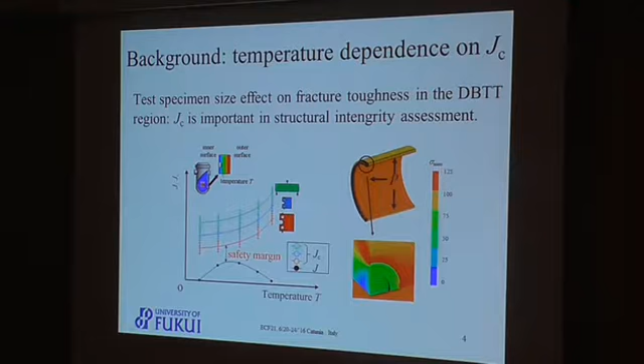One of the widely accepted methods to bypass this test specimen size effect of JC is the master curve approach. The approach assumes a statistical weakest link model for cleavage fracture and uses a Weibull distribution to express the scatter of fracture toughness KJC. The procedure is based on the concept that a normalized curve of the median fracture toughness for 1T, a 25 millimeter size thick specimen, versus temperature is applicable to a wide range of ferritic pressure vessel steels and structural steels.

Thus, KJC median was expected to be expressed with a single parameter, the master reference temperature T0. Despite the efforts to apply the method, the approach is not without its limitations. For example, some results have shown that the master curve reference temperature obtained from SEB specimen and CT specimen show approximately 10 centigrade difference.

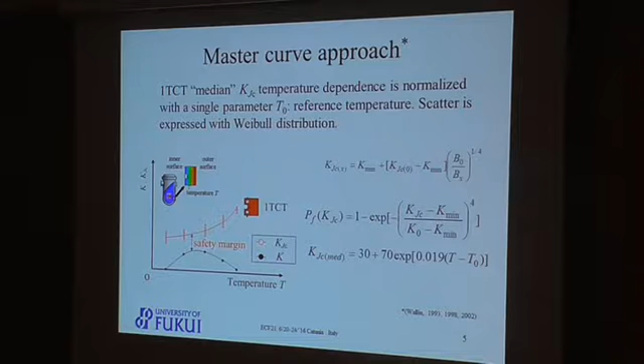We first sought to re-examine Chen et al.'s opinion that it is necessary to distinguish the minimum fracture toughness, or the lower boundary values of toughness, from that of the scatter band of toughness. The former is a definite parameter determined by the specimen geometry and tensile properties, and the latter is a statistical behavior determined by the distribution of the weakest constituent.

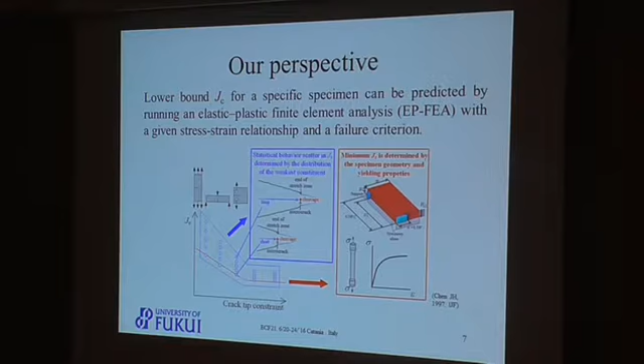We interpreted Chen et al.'s opinion as meaning that at least the lower bound JC might be predicted by running elastic plastic finite element analysis, EPFEA, with a given stress-strain relationship with a failure criterion.

For the failure criterion, we considered a modified Ritchie-Rice failure criterion, that is the 4 times CTOD sigma 22C criterion, which predicts the onset of cleavage fracture when the crack opening stress sigma 22, measured at a distance from the crack tip equal to 4 times CTOD (crack tip opening displacement delta T), hereafter denoted as sigma 22D, exceeds a critical value sigma 22C.

This criterion was validated as explaining the crack tip constraint dependence of JC by Dodds et al., and the test specimen thickness dependence of JC by Shih. Through examination of the applicability of the 4 times CTOD sigma 22C criterion to the decommissioned reactor pressure vessel steel JC database, with test specimen thicknesses ranging from 8 to 254 millimeters,

we reached the idea that the convergence of sigma 22D with increasing load is necessary for fracture initiation, because fracture always occurred after sigma 22D reached sigma 22C.

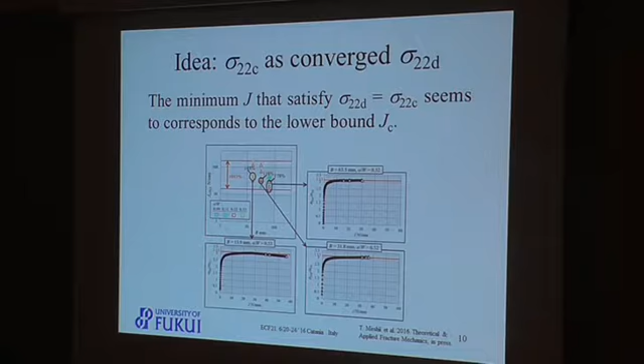Given these observations, we thought that the lower bound fracture toughness for different specimen types and thicknesses can be predicted by calculating the minimum J that could satisfy sigma 22D equals sigma 22C, using EPFEA with a given stress-strain relationship.

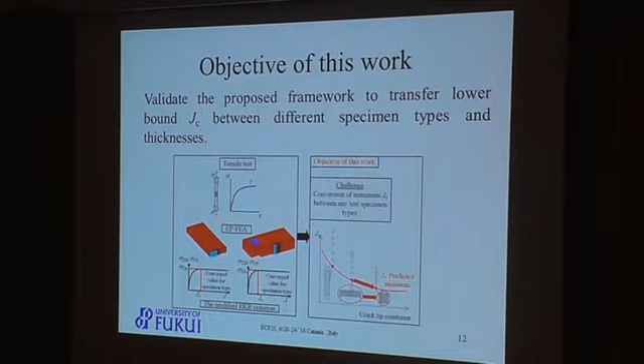Thus, the objective of this work was set to validate the proposed framework to transfer lower bound JC between different specimen types and thicknesses.

Given that the room temperature tensile to yield stress ratio of Euro RPVs and Japanese RPVs is about 1.3, 0.55% carbon steel JIS S55C, whose room temperature stress ratio is known to show a higher value of 1.8, was selected for examination and tested at 20 centigrade.

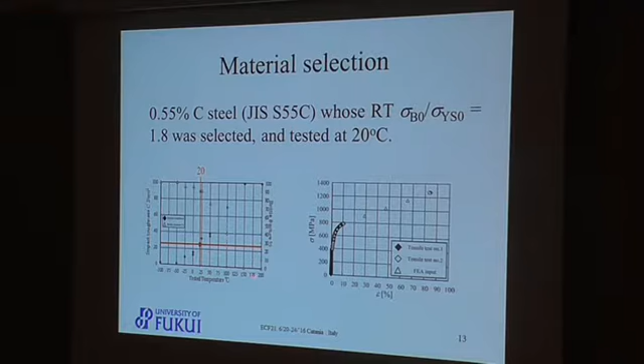The Charpy impact test results and tensile test results are shown in these figures. 0.5T SEB and 1T CT specimens were examined.

The details of the EPFEA are summarized on this page. The FEA J, designated as JFEA, was evaluated using the load versus crack mouth opening displacement diagram for the SEB specimen, and load versus load line displacement diagrams for the CT specimen, based on ASTM E1921. CTOD was measured at node A.

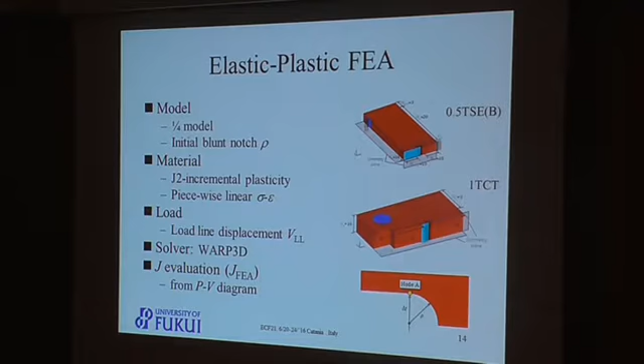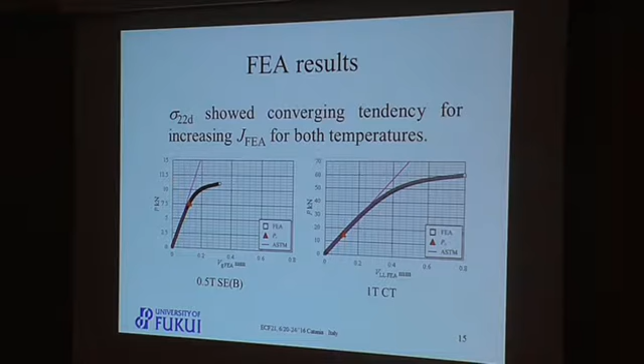After confirming that the linear portion of the load versus displacement diagrams showed good agreement with the relationships described in ASTM E1820, the relationship between sigma 22d, the crack opening stress sigma 22 measured at the distance from the crack equal to 4 times CTOD at the specimen midplane, and JFEA was summarized in these figures. For both specimen types, sigma 22d showed converging tendency for increasing load as expected.

Considering the fact that fracture always occurred after sigma 22d reached sigma 22c, we thought that the minimum J that could satisfy sigma 22d is equal to sigma 22c, hereafter denoted as JS, would predict the lower bound fracture toughness for the specified specimen at the specific temperature.

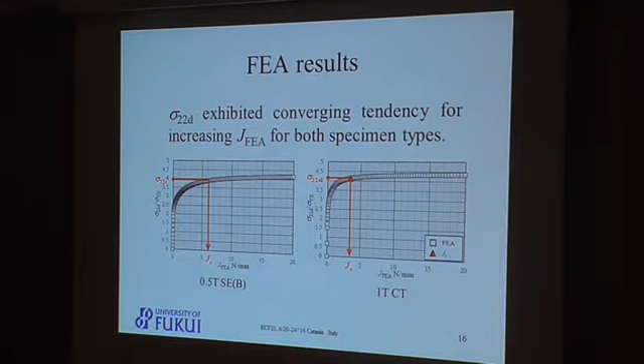Since there is not a definite method to determine the converged value of sigma 22d, here we applied the following method. First, the data set of sigma 22d and JFEA was fitted with a function shown here. Then, J at the value of normalized sigma 22d over the converged value of alpha 1 plus alpha 2 is equal to 0.95 was defined as the JS, the predicted lower bound fracture toughness.

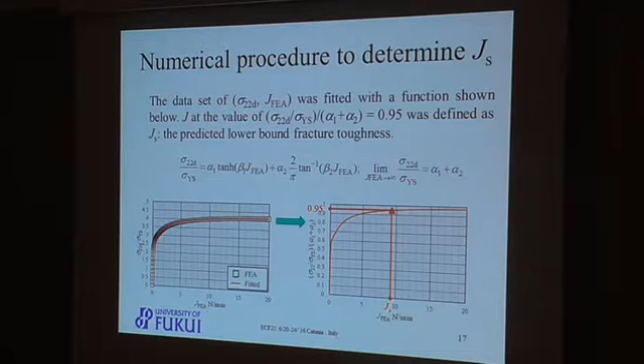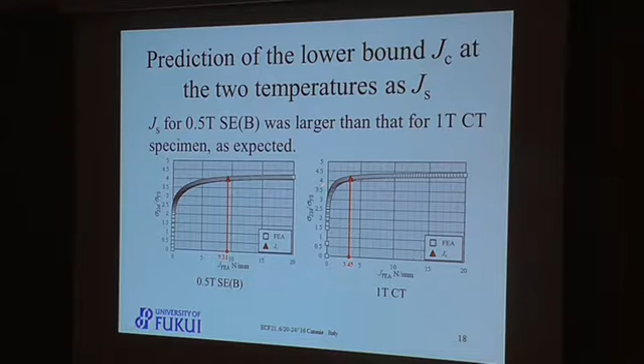By using this method, the predicted values of JS was obtained as 9.3 and 3.5 Newton per millimeter for these specimen types respectively. For both, the tendency that the predicted JS for half T SE(B) specimen is higher than that obtained from 1TCT specimen was observed as expected.

Fracture toughness tests were conducted in accordance with ASTM E1921. The master curve reference temperature T0 for 1TCT specimen was obtained as 24.2 centigrade.

Though there might be an opinion that the 2% tolerance bound values are still not the lower bound values in a strict sense, it seems that the predicted JSs gives a good estimate of the lower bound JC in a practical sense. Thus, we concluded that the proposed framework has a possibility to transfer the lower bound JC between different specimen types and thicknesses in an engineering sense.

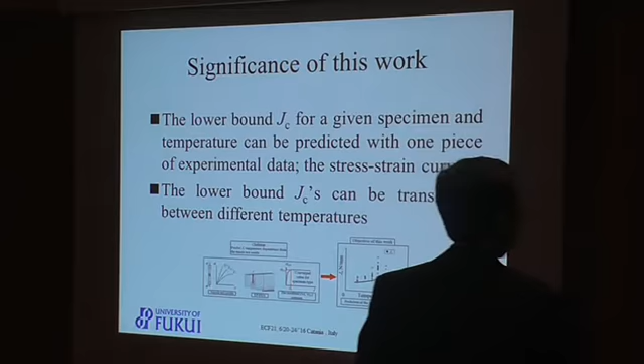Next page. Okay. So, despite the presented success, we acknowledge the needs of some future works to be done before finalizing the proposed framework. We are aware that a threshold value of 0.95 for the FEA modeling will affect the proposed predicted JSs, and are working on a way to finalize and standardize this issue. And besides this numerical procedure, we are also aware that we have to clarify the physical meaning of the predicted JSs, though this is an engineering approach.

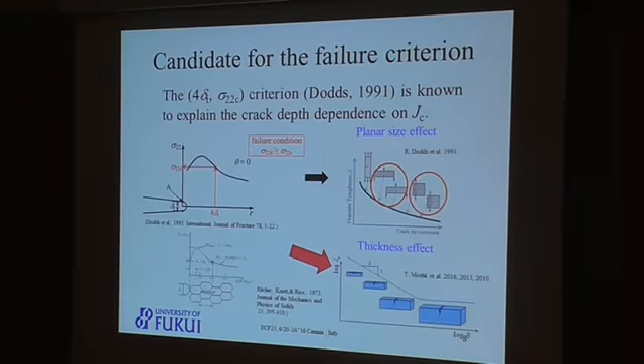Some rough side evidence we recognize is that the predicted JS seems to correspond to the turning point of the load versus load line displacement diagram. That is, if fracture is to occur at this load, then no plastic deformation is observed before cleavage fracture. Because we are considering elastic plastic fracture toughness JC, this finding seems to give some idea of the lower bound JC in a practical sense.

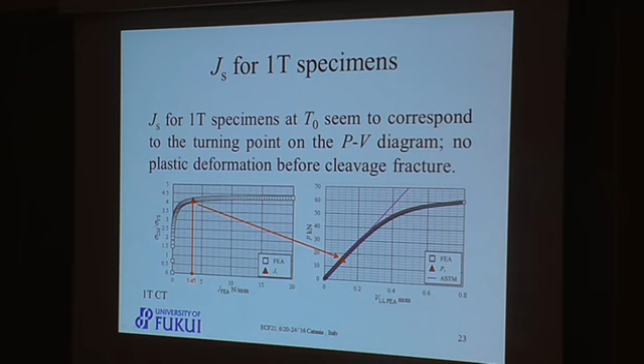The success of the master curve approach based on 1TCT specimen seemed to support this finding. So sorry for your inconvenience, and this is the conclusions of my talk.